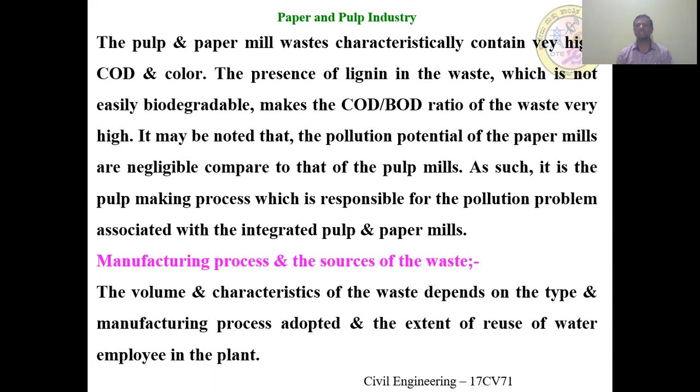The volume and characteristics of the waste depend on the type of manufacturing process adopted and the extent of reuse of water employed in the plant. In the pulp making phase, the chipped cellulose raw materials are digested with different chemicals in one tank under high temperature and pressure.

So first you're going to get the wood cut into small pieces. These chipped pieces of cellulose, that is wood, are digested in a tank by adding some chemicals at high temperature and pressure. The process thus loosens the cellulose fibers and dissolves the lignin.

The Kraft process or sulfate process of pulp making uses sodium sulfate, sodium hydroxide and sodium sulfide as digestive chemicals. The digestion means we are going to break up lignin or cellulose into small pulp. The spent liquor produced by the process of digestion is called black liquor.

This is not only very rich in lignin content but also contains a large amount of unutilized chemicals, because in the digestion of that cellulose by the chemicals, some amount may be retained as it is. Therefore, this black liquor is treated separately for recovery. The cellulosic fiber, after being separated from the black liquor, is washed and then partially dewatered.

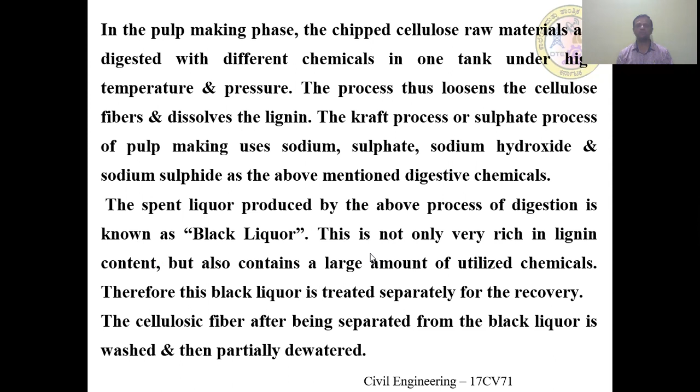The washed cellulosic fibers are then sent to bleaching in three stages, where chlorine, caustic and hypochlorite are used in successive stages. The wastewater from the first stage and last stage is light yellow in color, while that of the caustic extraction stage is highly colored.

In the paper mill, the pulp is disintegrated and mixed with various filler materials like alum, talc and dyes, and the pulp is refined in a machine known as a Jordan. Now, this pulp is carried by a traveling belt of fine screen to a series of rollers where the final paper product is produced. The drained water, called white water, forms the wastewater of the paper mill section.

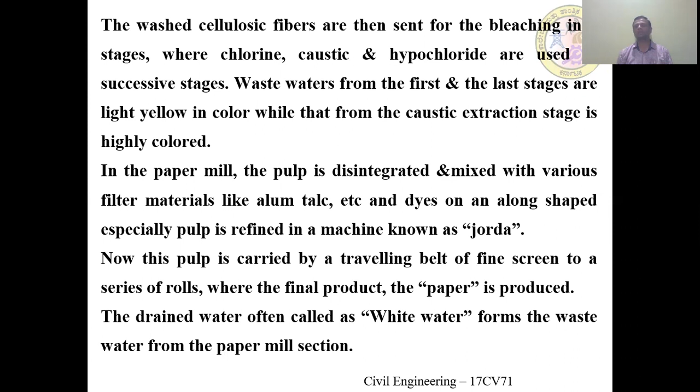So here, first it is digested, then you go for bleaching in three stages: chlorine, caustic, hypochlorite. It is generally yellow in color. Then it is disintegrated and mixed with various materials like alum, talc, dyes, etc. And you pass it through a conveyor belt to get the final paper.

The black liquor of the Kraft process is concentrated by evaporation and then incinerated with the addition of sodium sulfate. The organics like lignin, resin, etc. are burnt off and the smelt is dissolved in water. The resulting liquid is known as green liquor. Lime is now added to this liquor, resulting in formation of white liquor and lime mud, containing chiefly digesting chemicals, and it is sent for use in the digester.

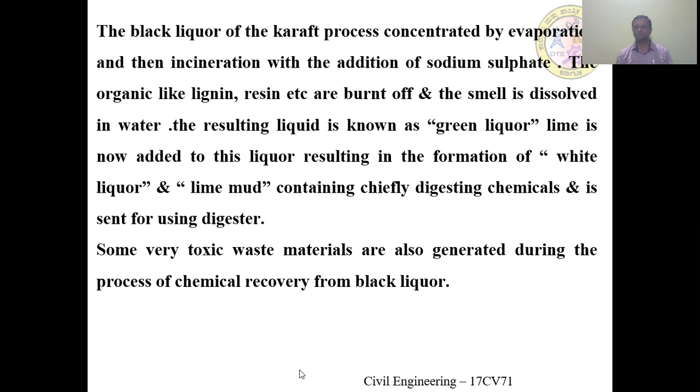Some very toxic waste materials are also generated during the process of chemical recovery from the black liquor. Now we'll discuss the characteristics of pulp and paper mill waste. In most small paper mills in India, chemical recovery is not practiced due to economic reasons. As such, the pollution potential of the waste of smaller mills is higher than that of larger mills, since larger mills have different treatment procedures.

Generally, pulp and paper mill wastes are characterized by very strong color, high BOD, high suspended solids, and a high COD to BOD ratio. For the wastewater of the pulp and paper mill, we are concentrating on color, BOD, suspended solids, and COD to BOD ratio.

Large mills produce a large amount of lime mud, and without being calcined, it is discharged as waste. This lime mud in the large mills contributes 86.5% of the total suspended solids in the effluent. So the maximum amount, 86.5%, will be lime mud. The waste volume produced from the digester sections is also higher in the case of small mills, as the entire quantity of black liquor is wasted in such mills.

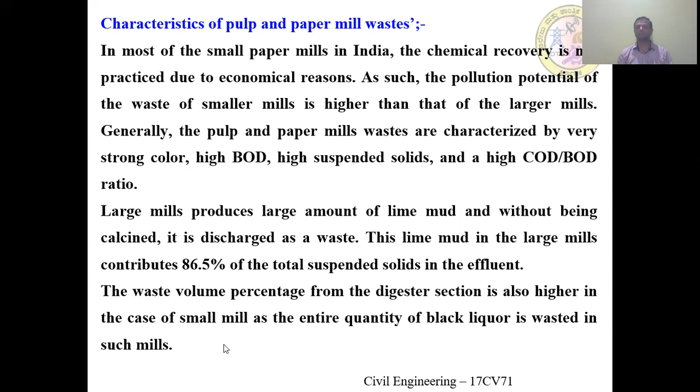As you know, what are the wastes coming out from the pulp and paper mill, and how will they affect water bodies, the sewers? Crude pulp and paper mill waste or insufficiently treated waste causes very serious pollution problems. As already discussed, it has a high amount of suspended solids and BOD.

When discharged into the streams, the pollution extends over a large stretch due to the presence of slowly decomposing components in the waste. Since lignin is slow in degradation, it will take more time or more length in the river stream. Toxic effects may also be induced upon the flora and fauna of the stream due to sulfite and phenol in the waste. So these are the effects of paper and pulp mill waste on water bodies.

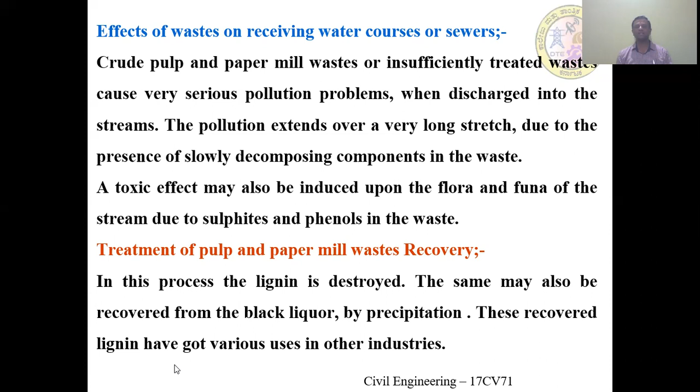How can this mill waste be treated? As I discussed earlier, lignin is destroyed. The same may also be recovered from the black liquor by precipitation. The recovered lignin has various uses in other industries. The byproduct recovered from the paper and pulp industry is nothing but lignin. Lignin can be used as a dispersing agent in various suspensions. Activated carbon may also be manufactured from the lignin recovered from the black liquor.

Chemical treatment is meant to remove color. Chemical coagulation for the removal of color is found to be uneconomical. Results are not encouraging. The treatment of green liquor with colored lime sludge results in the formation of a dark brown liquor containing both desired cooking chemicals and color-producing components like lignin.

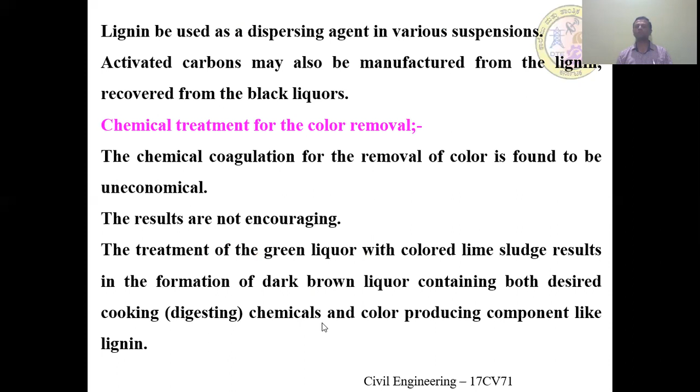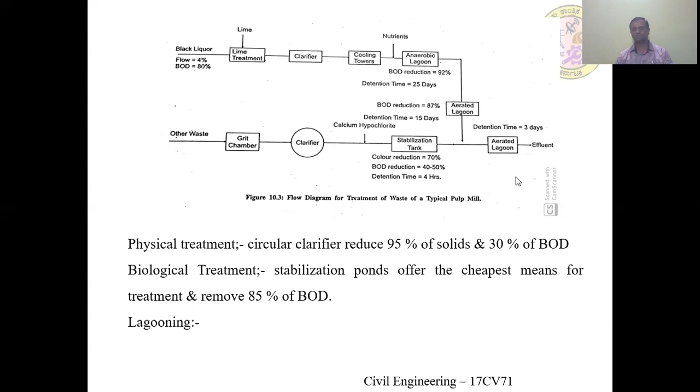Now let us discuss some multiple choice questions. Blank removal from chemical pulps leads to higher fiber bonding strength in the paper, but strong chemical pulping decreases the length of the cellulose molecule, resulting in weaker fiber. It is lignin, because it has a good bond and is not easily biodegradable, so you have to weaken it so it can be degraded. The dilution factor is a measure of the amount of water used in washing. The Kraft process is also called sulfide alkali; it is also called the sulfate process.

The blank is a device for continuously forming, pressing and drying of paper fibers. It is the paper machine, a device for continuously forming, pressing and drying a web of paper fibers. The source of blank arising from locations outside the mills to expedite the papermaking process is called recycled fiber. What is the purpose of a barker? A barker removes bark from wood before chipping, so you get cellulose material for the next process. Pulp from bamboo is utilized in fine papers, and the resulting paper is weaker than paper of straw.